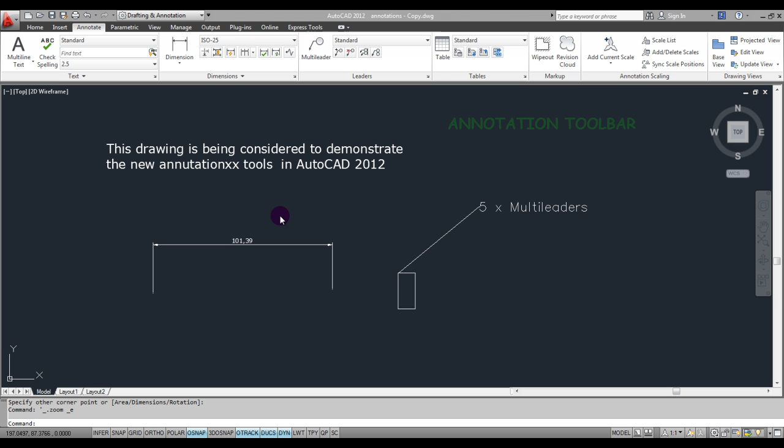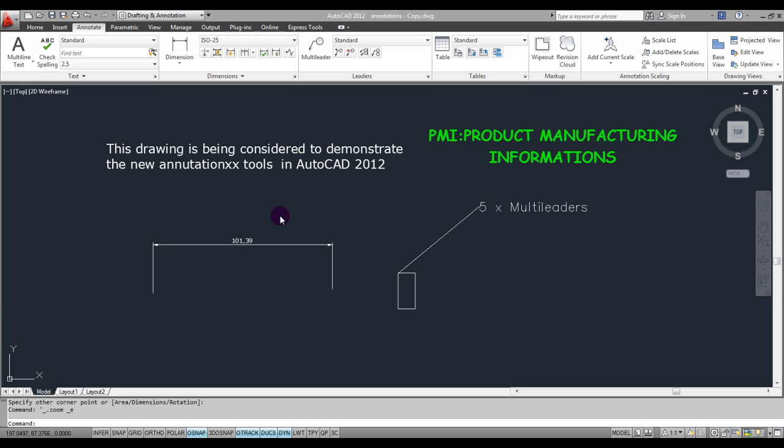Annotation is used purely to add text information, dimensions, or leaders, or maybe the QC which you do through markup, and also the table which you use for bill of quantity, etc. These are the information which you add to your drawing in order to increase the meaning for manufacturing or any other purpose. That is one of the fundamental rules we have to use under annotation.

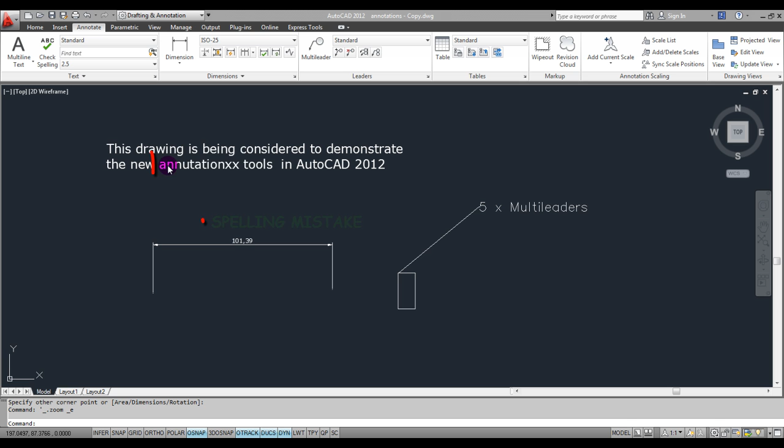If you see this particular text: this drawing is being considered to demonstrate the new annotation tools in AutoCAD 2012. Here you can see this particular string or word is not correct, and also somewhere I need to replace some string out of the multi-line, or edit it. So how can you quickly do it?

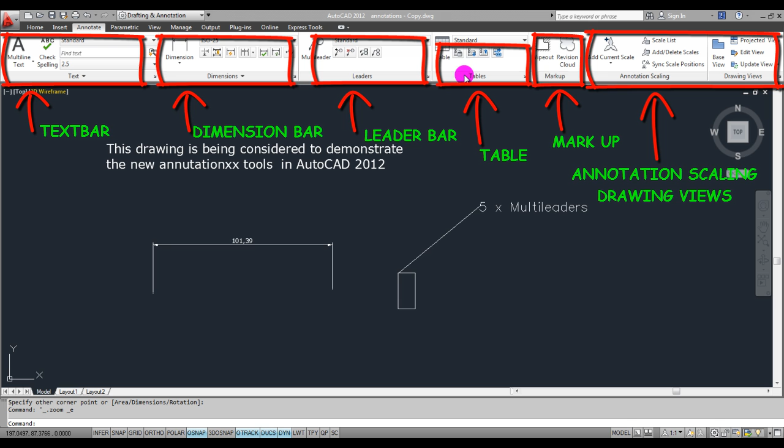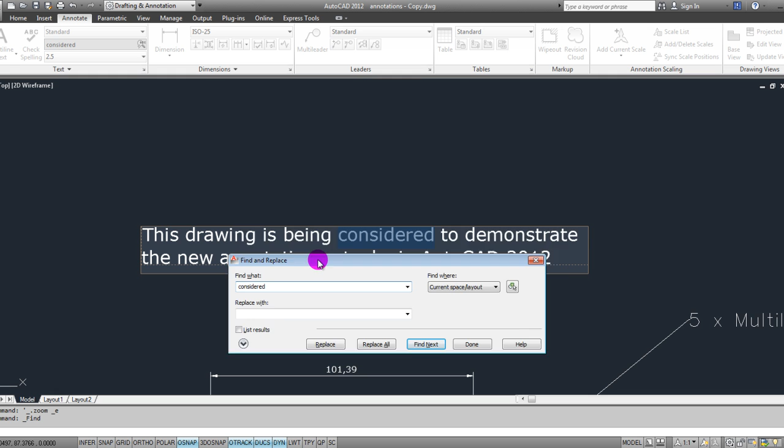The annotation panel is classified into text, dimension, leaders, table, markup, annotation scaling, etc. So if you come here, the Find Text, and I will type 'considered', and press enter, what happens is this particular string is highlighted, and directly you can do the replace. Maybe I'll use 'used', and you can go for replace, and one match found and one object changed. This status also you can see.

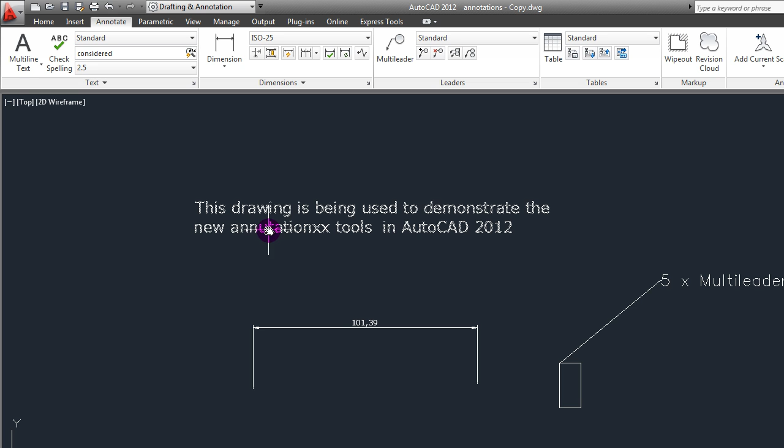In other way, what you can do is selections through some other method also. If you go to 'considered' and I'll go to 'used', or what you can do is Find Where - you can do the entire drawing also. You have multiple text out of the drawing, you can select this particular object. Through the selection method you can use this as well, or you can search and replace the corresponding item or text string.

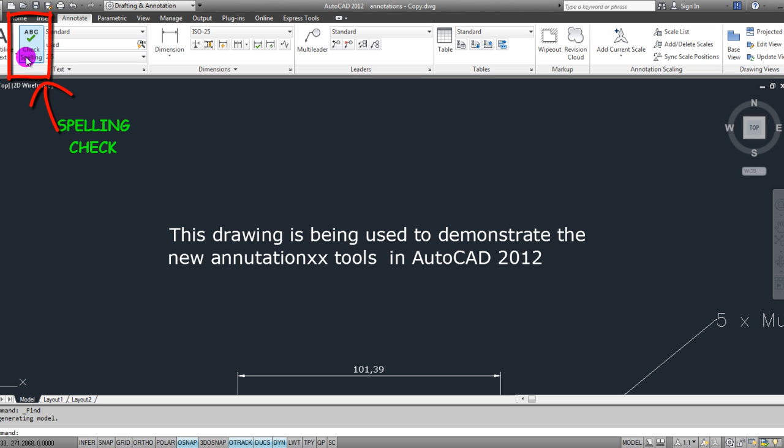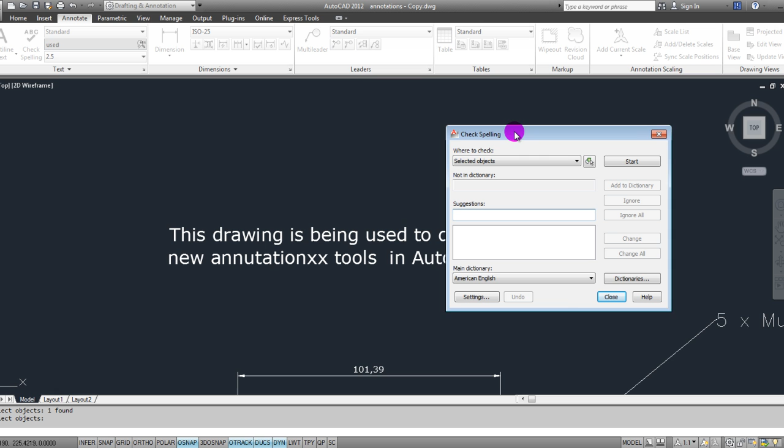You can do the spelling check also, Check Spelling. You can see here this is not correct, it should be 'annotation'. So I'll go to spelling check, go for the current selected object, and go to selection, and you can pick the string and press enter key, and you can click here 'start'. So this particular string is not correct, and you can see here the suggestion 'annotation', and I can go for Change. So spelling check is complete, and you can do the corrections as well.

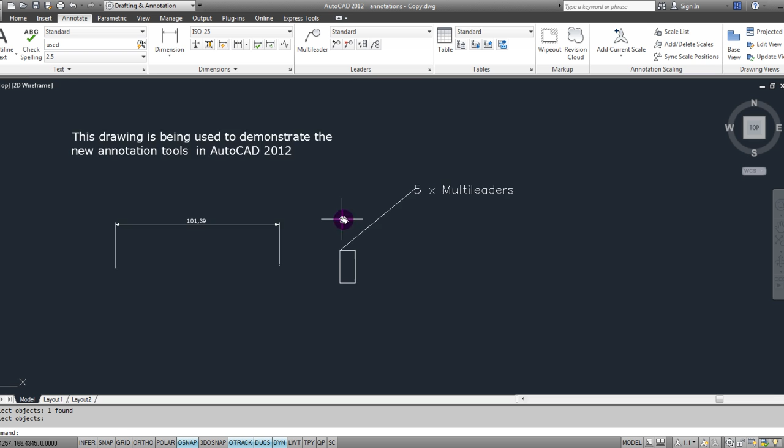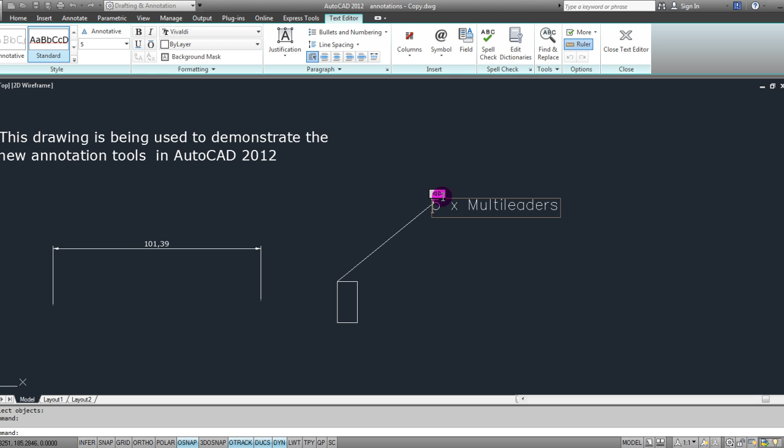If you see the multi-leaders also, directly you can do the editing by double click, and you see the text editor where you can have the style, formatting, paragraph, or you can insert special symbols, or arrange through columns, and you can have special fields also, or do the spell check as well. I need to edit this to '3' in multi-leaders, and I'll go for Close Text Editor. So directly you can do the change.

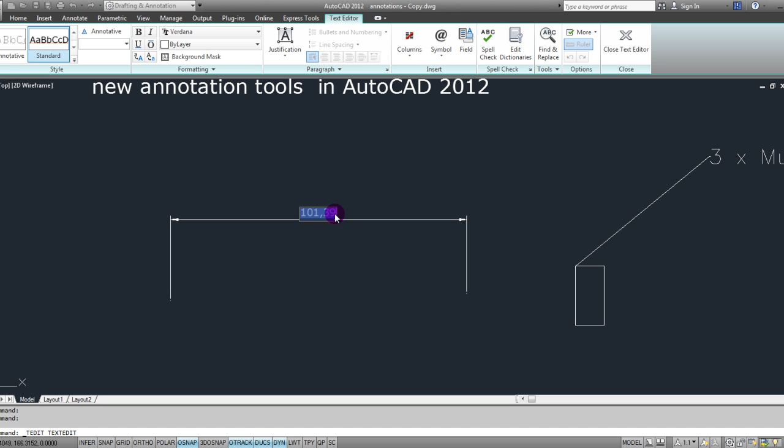If you talk about dimensional editing, this also can be made through double click, and you can see the text editor, and here you can directly do the change whatever you need. So directly you double click and you get this text, and I can do the required changes.

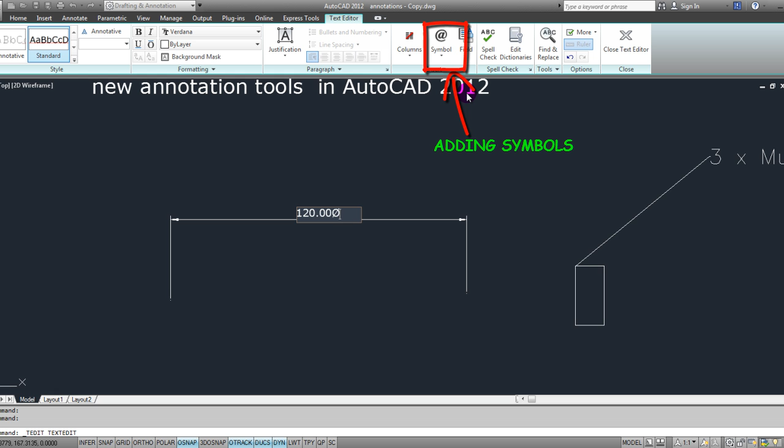Also you can have a particular layer consideration, or justify top left, and you can add specific symbols. If you need a diameter symbol, you can directly define through this insert panel as well, and go to Close Text Editor.

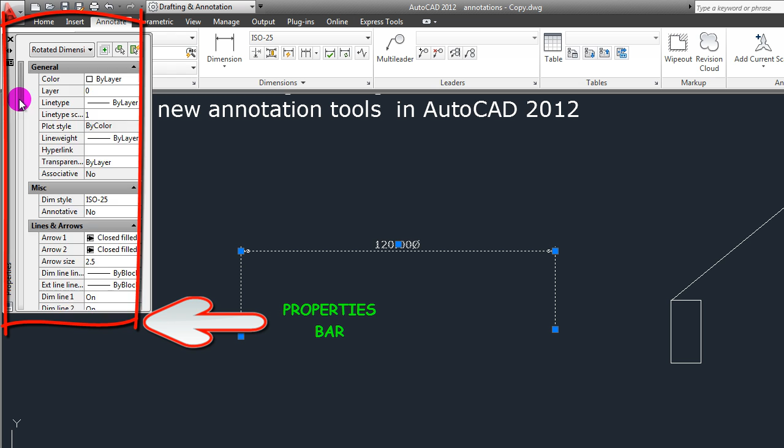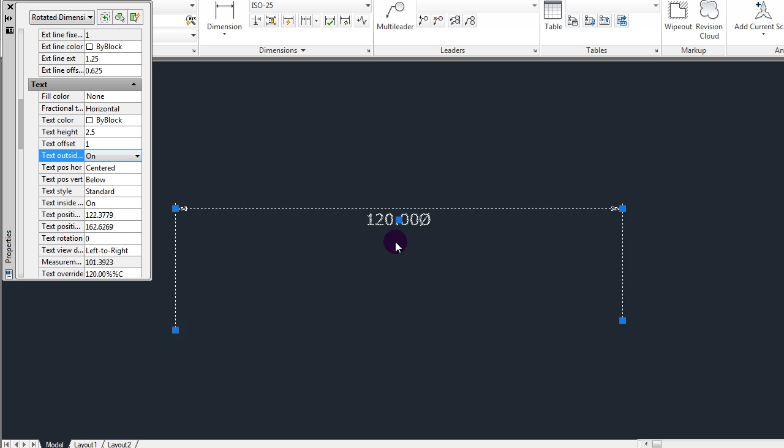Other than this, you can control a couple more options through the properties bar also. You can control the text position vertical, whether it is above or below, and also you can define the text offset, maybe 1, for how it is offset from the boundary line. This also you can directly define through this process. Or text height, and many other properties which you can do also.

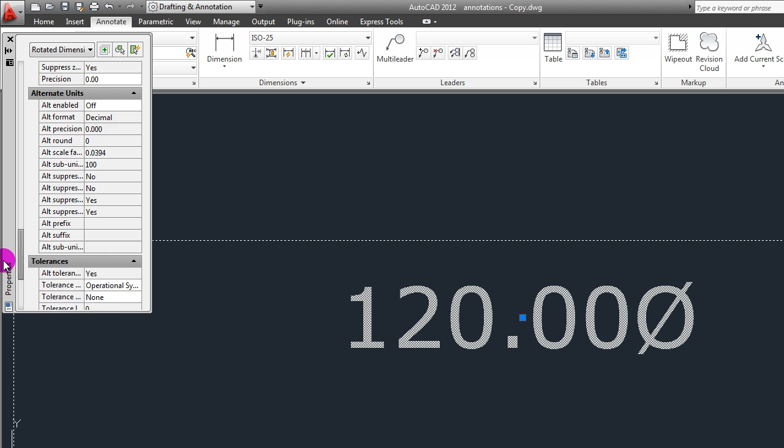The dimension scale as well, and so on. Multiple options you can control as part of tolerance, alternate unit if you need. You can enable these, and have the alternate unit in whichever format you need. So you can have two units simultaneously, one maybe in the British system, one maybe in the metric system - that you can always do.